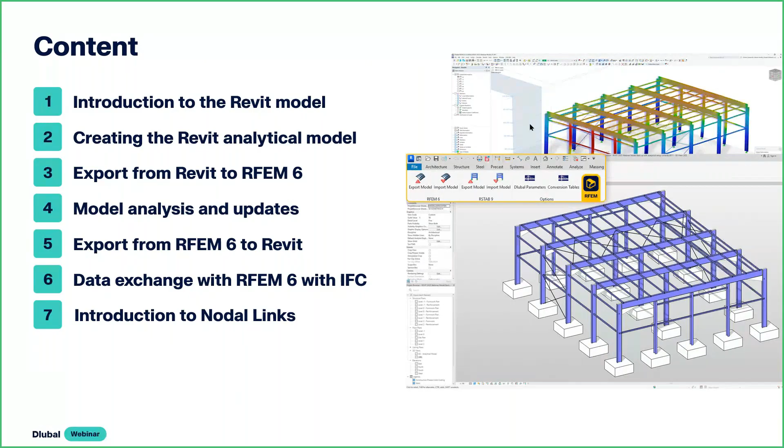So now I will switch over to Revit, and here is the model that I've prepared. It's a basic steel structure consisting of steel frames with some coupling members and some X-bracing. You can see that for my column, I have my cross sections. Most of these are all W shapes, and then I have steel A992 for the W shapes, and then I have my X bracing assigned.

And this is the structure that you would create, probably from the architect. The plan is to help the structural engineer by exporting this structure to RFEM 6.

So to do that, first we want to go into the Dlubal tab. This tab, our Dlubal plugin, is our direct link. This is what you will want to install after installing Revit. It needs to be installed manually. But once you do, you'll have these 6 buttons here.

The first 2 buttons are for exporting and importing the model between RFEM. Then you also have the same options, but for RSTAB or other programs. And then you have these last 2 buttons, the main one being the conversion tables. So I'm going to open up the conversion tables and just go over these quickly.

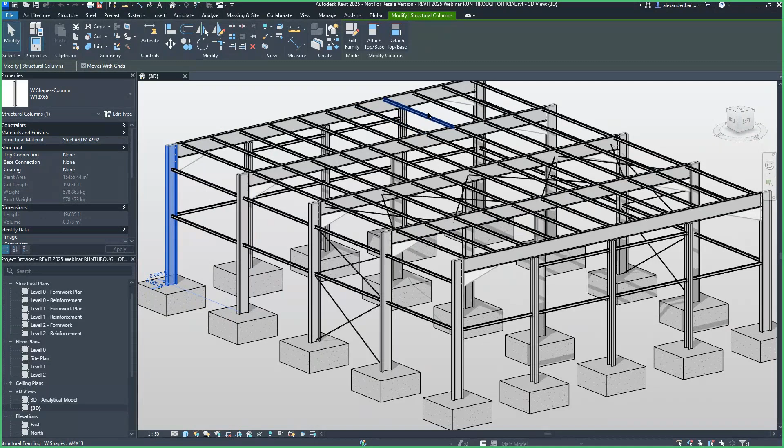So to do this, first we'll go to the Analyze tab. And under the Analyze tab, there's a button here called Analytical Automation. This is what's going to help us create that analytical model.

Here you can see the first option is we can go from an analytical model to a physical model, or we can go from a physical model to an analytical model. This is the option we want to go with today.

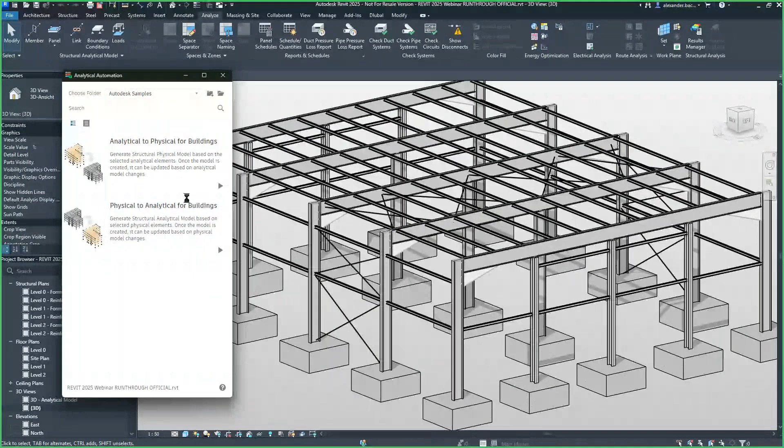I'll click on that, and then you'll see some additional options come up. The first thing we want to do is select what we want to convert graphically. So I will select that graphically in Revit. Now that that's selected, we have a next option here.

This is a tolerance. Right now, this custom tolerance, basically if a member is within this tolerance, then it will be connected. The analytical member will be connected within this tolerance. This is based off of a length, and my units right now are in feet, so this is 1 foot.

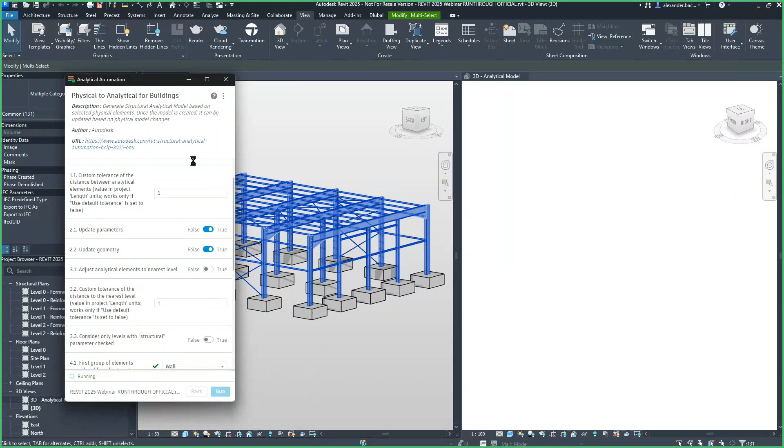Let me open also the analytical model and put them side by side. Let's run this to see what 1 foot looks like. And so I've created, you can see the analytical model based off that 1 foot tolerance has been generated.

You can see that my coupling members here connected to the beam because they're within that 1 foot. You can also notice some other members have also done the same. If we change this to something like 0.8 feet and run it...

Now you can see that those members have straightened out and everything looks better, but you'll notice that my coupling members are still kind of floating here, and some of these other members aren't completely straight. Also I have this cantilever at the end of my column as well.

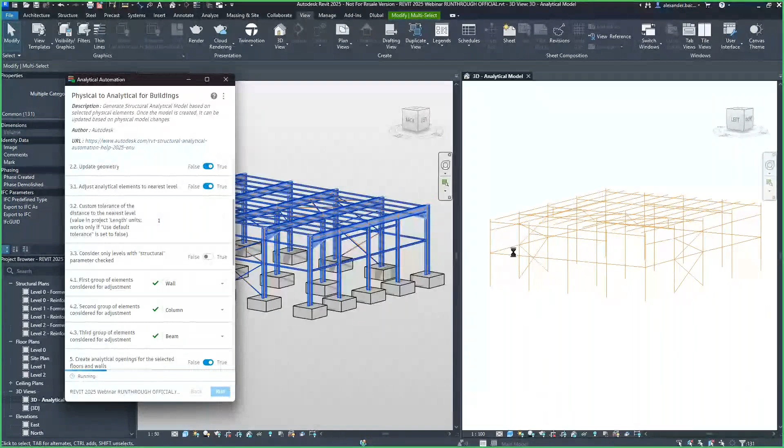So there's another option we can use to fix that, and that is the adjust analytical elements to nearest level. Once I turn that option on and run it, we'll see what that looks like. That'll adjust all the members to the levels that are created in Revit.

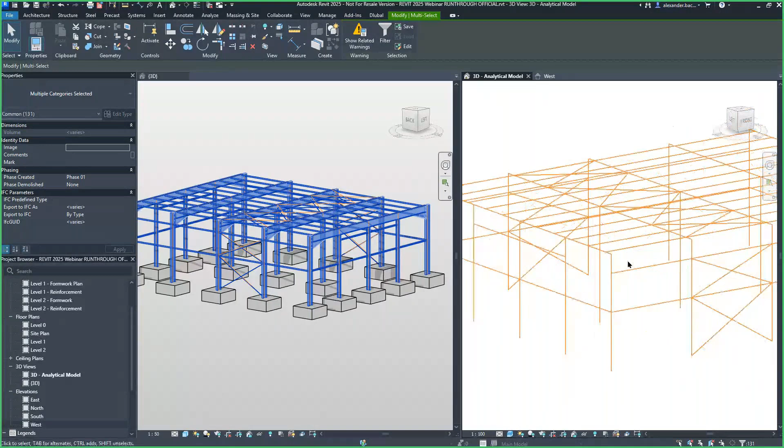For example, if I look at the west view, all of the members or all the analytical lines will now be adjusted to these levels. So now everything looks better. Everything is straight and all of my members are connected and everything looks good.

The only issue with this is now it's not super optimal because my analytical lines are now resting on the flanges of my beams, whereas I would like these analytical lines to be in the center of my beams.

So what I can do is there is another option that can help with this, and that is called consider only levels with structural parameter checked. I can check this on, and all of my analytical lines will adjust to any level, if I click on one of these levels, any level that has this structural option turned on.

So what I'll do to utilize this option is I'll create some copies of my levels and activate that option. This first level, I'll just go through, create a copy, and then I'm going to move that copy down like so. With that copy, I'm going to rename it, and I'm going to check on the option structural.

So then I'll do the same thing with this level. Create a copy, move it down, rename it, and check on that option. And then we can do the same thing for this last level, like so.

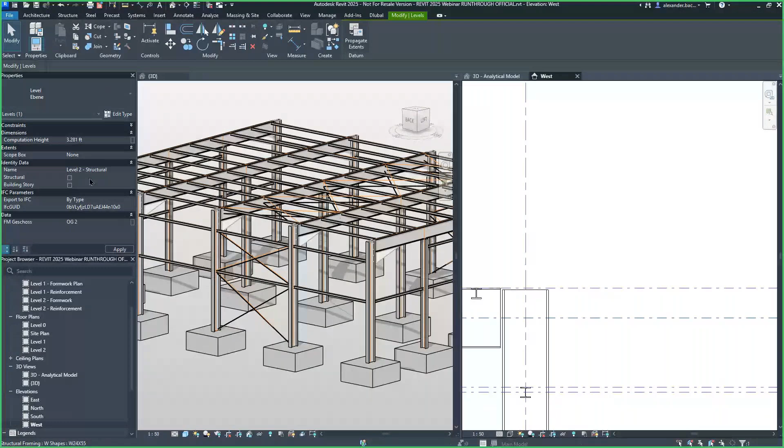Okay, so now once those are created, now we can open that panel back up, and we can turn on consider only levels with structural parameter checked. Now this option does also come with another tolerance. So let's see what it looks like.

For example, if I exaggerate that tolerance, we can see how the tolerance works. If I turn that on, you can see that members down here have been sucked up into this level, into this level, because they're within that 10 feet that I entered.

So that's not a great value. So what if I do something too small? Now you can see that my coupling members didn't get into the level. Some things aren't in there.

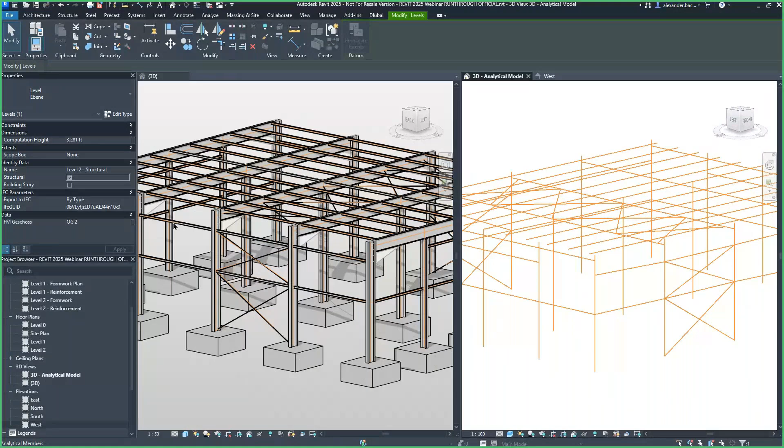So the best thing to do, I mean, well, one is the good happy medium. So we'll run it with 1, but that's how that tolerance works. And so now our analytical model is created. Now you can see that my analytical lines are within the center of my beam.

And yeah, everything is connected. All my cross bracing, they're all meeting at the same joints and everything. So that's good. So that's how you can create an analytical model within Revit using that tool.

Now that we have our analytical model, there's other model data you can add, like boundary conditions. If I go under Analyze and Boundary Conditions, I could add point, line, or area supports in my analytical model. I can also add loading, like point loads, line loads, and area loads, along with load cases and load combinations.

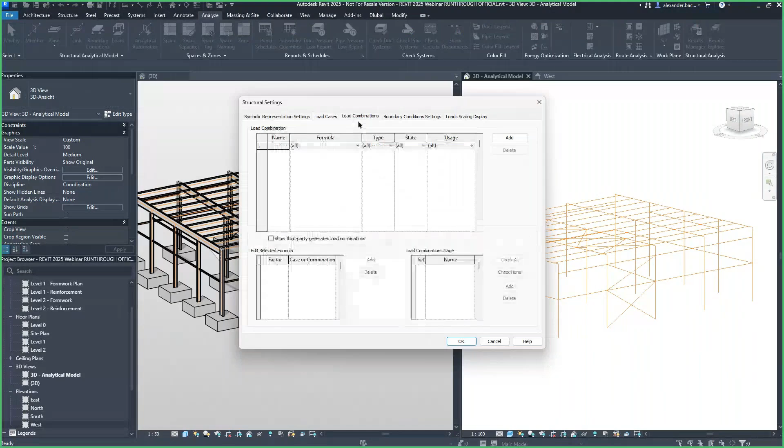All of this info can be carried over into RFEM. So if you wanted your Revit model to be your all-in-one model, doing your architectural detailing and also creating the structural info, you can do that. Or you can simply leave it up to the structural engineer and export the analytical model into RFEM. It's totally up to you.

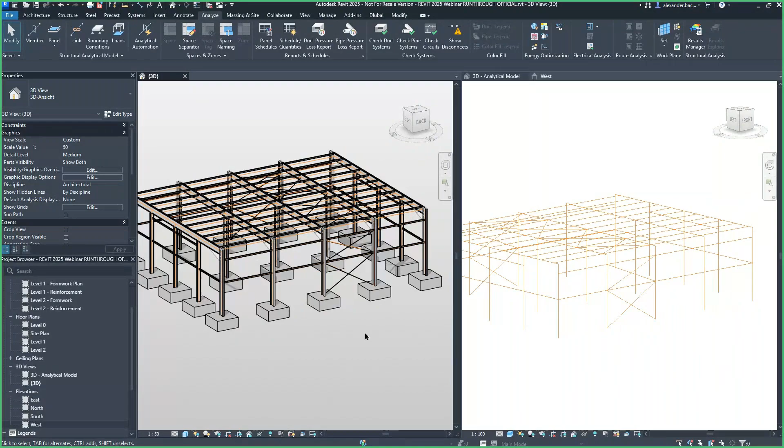So now we'll go over exporting this to RFEM. I'm going to move my windows over, and we'll go up to Dlubal and go to Export Model. We want to export this model to RFEM 6.

You can either create a new structure and have RFEM create a new file and import the model in, or you can overwrite an existing structure. I'm going to create a new structure and have RFEM create a new file.

On top of that, I can also have RFEM open up a previously saved template. I have a template I've created from a previous model, and it's really easy to do once you have the model you want to use as a template—it could even be a blank model. You go to File, then Save as Template. Then all you need to do in Revit or in the Dlubal plugin is point your computer to wherever that template file is saved. So now when it opens a new file, it'll open that template, so it's not a completely blank file. That's great if you want to save things like load combinations or anything.

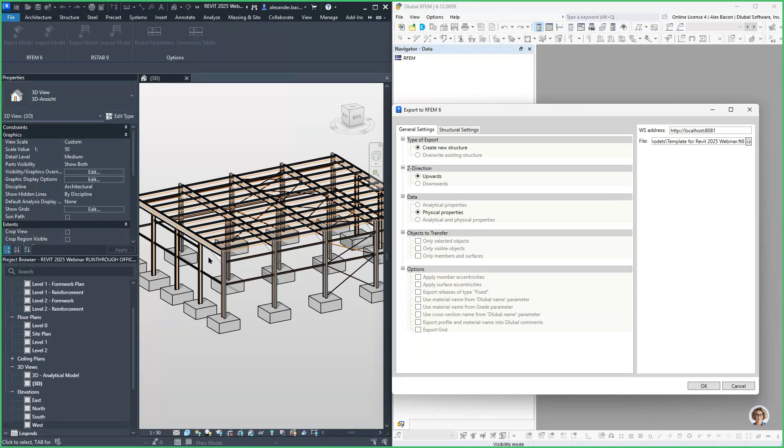I can also set the Z direction to upward, which is what I'll keep it as. You can choose between the analytical, physical, or both to export. I'm going to choose the physical—the reason doesn't really matter, but the physical model and the analytical model in Revit can have different model data. For example, the analytical could have different sections or materials compared to the physical. I'm choosing the physical because it keeps the member rotations correct, which is good.

For objects to transfer, you could transfer only selected objects or only visible ones, so you can play around with that. Lastly, the grid can be exported, but I'm not going to. On the second tab, model data, I'm exporting model data. You can export the loads too, but I don't have any defined, so I'm not going to. Now once I click OK, that'll start the export process.

This is where Revit and RFEM communicate with each other via API. This is a good time to mention that both programs need to be installed on the same PC—this is a requirement of the Dlubal plugin. But now that the export is done, we can see the model over here in RFEM.

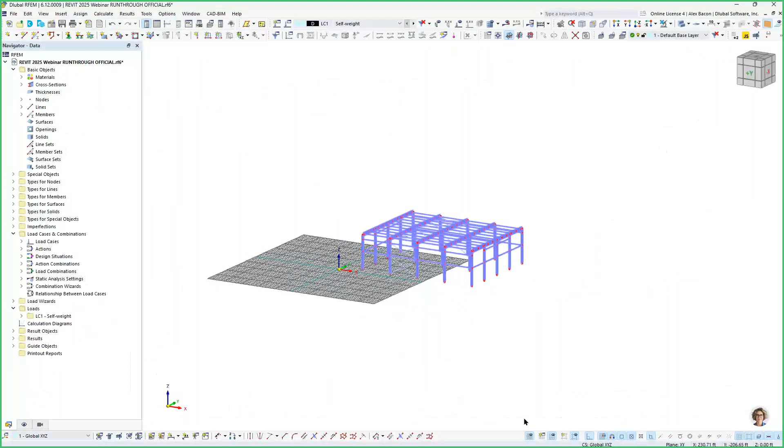So the model has been imported. The first thing that's always good to do when you import a model is to check it visually. You can check and make sure your materials have been correctly mapped over, along with all of your sections.

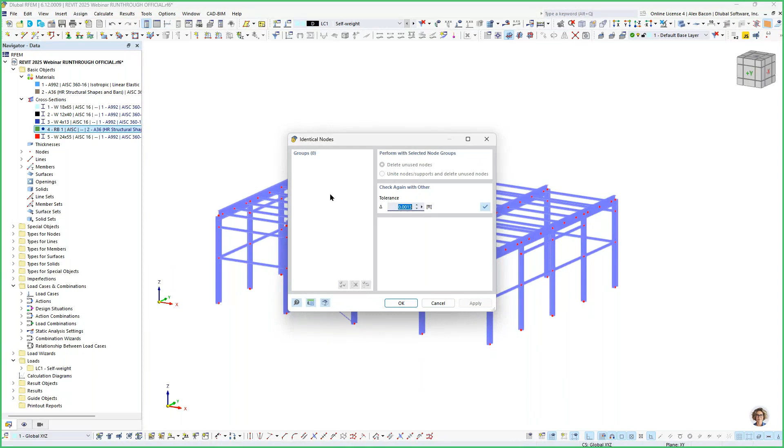There are also tools within RFEM that can help you do model checks. If we go up to Tools, then Model Check, then Identical Node, this can check for identical nodes within a tolerance. If there are any nodes, more than one, that lie within this tolerance, they'll show up here. For example, if I type in 5 feet, you can see how it detects the nodes, and then you can choose what you want to do with those identical nodes.

The other tool we have for model checking is overlapping members, so we can check for those. I don't have any, but that's always a good thing to check for.

Now with this model, we want to prepare to run a simple self-weight check, just so we can check the results.

To get a better understanding of the structure, I'm going to render it according to section views. I can go to cross-section and get a nice view of each cross-section, color-coded. You can change the color of any of these, and that's a good render.

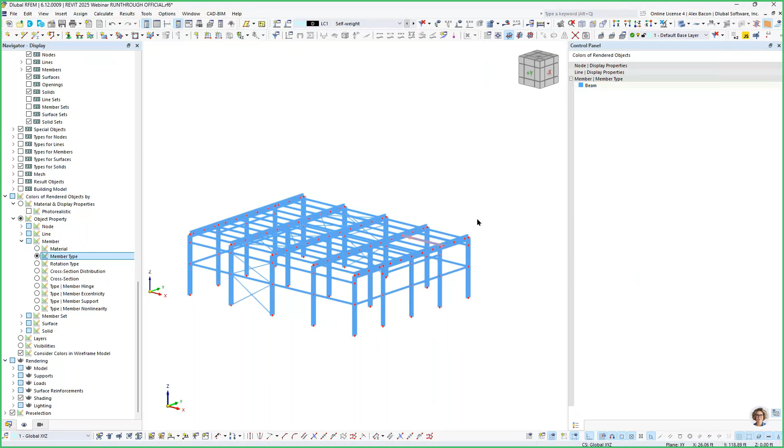We can also render it according to member type, so I can see all my members are set to beam. Another good one is member hinge, so I can see that I don't have any member hinges defined, meaning all my connections are currently completely rigid with all 6 degrees of freedom.

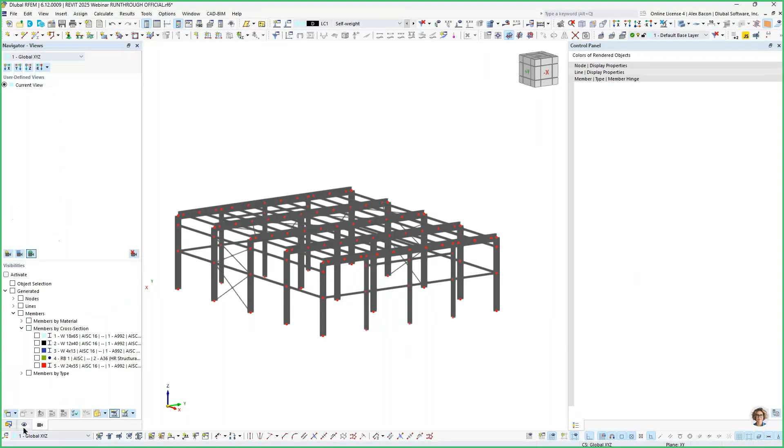Now I would like to edit some of my member types. I'll go to my views, change this back to member type, and isolate my cross bracing. I'll highlight all of those and change them to tension, so now these members can only take tension forces.

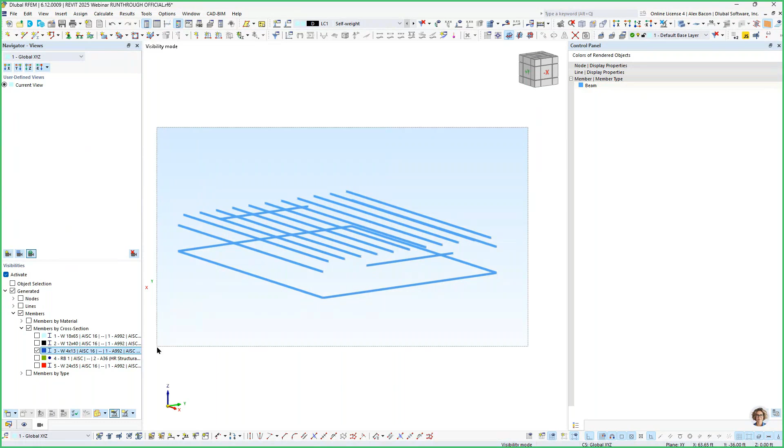Next, I want to change all of my coupling members to truss. I'll highlight all of my coupling members and change them to truss, so now those members cannot transfer moments—they have a pin connection.

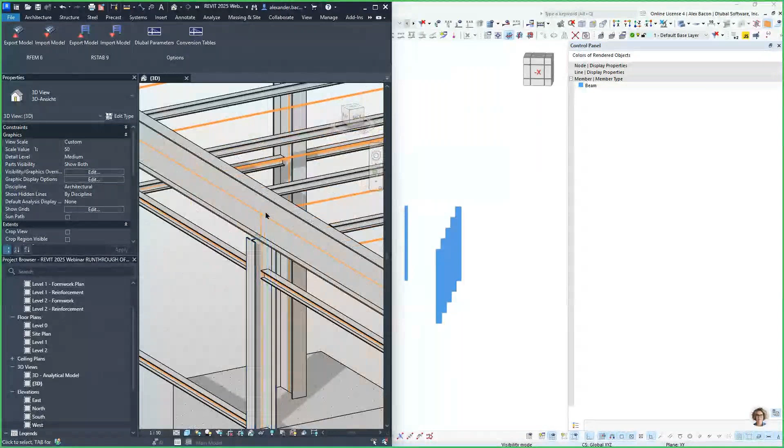Lastly, I'd also like to apply hinges to my wall and center columns, so I'll create or show those. I only want to apply member hinges since we have pin connections here at the top of my columns. I forgot to mention the connections—yes, I have some defined in Revit. For the columns and beams, I have plates and fasteners, and the columns framing into the beams here are pin connections, so I'd like to consider that in RFEM.

I'll go to the data navigator, under types for members, and double click on member hinges to create a new one. It's a moment release, and I can assign these member hinges to the tops of my members. I'll click OK again, and now you can see white pins at the top telling me I have member hinges there. Under the member hinges display, you can also see what that looks like with hinges assigned.

Lastly, before we can run the calculation, I'm going to exit this view. I also need to add nodal supports to the bottom, so I'll create or assign a hinged nodal support and highlight all of my nodes there. Now this structure is ready to run a self-weight load case, so I'm going to run the calculation.

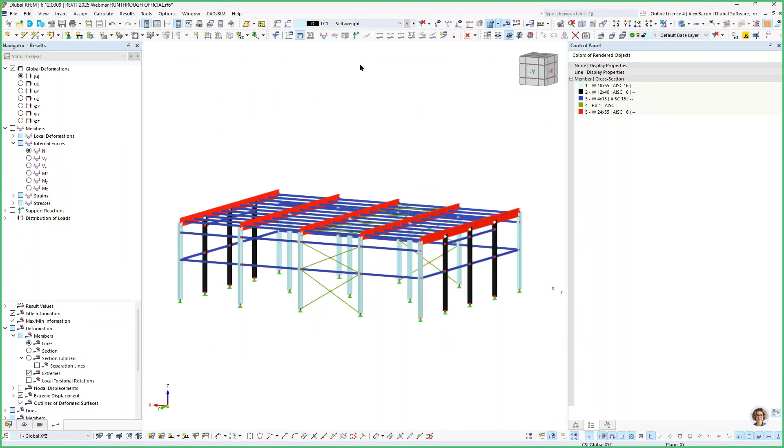It's done. Now the best thing to do is check the deformations—they really tell you a lot about the structure, and right now ours are looking good. I can change this to colored section and wireframe render; we're getting a max of 0.07 inches, which is in our coupling members. So we can check the deformation.

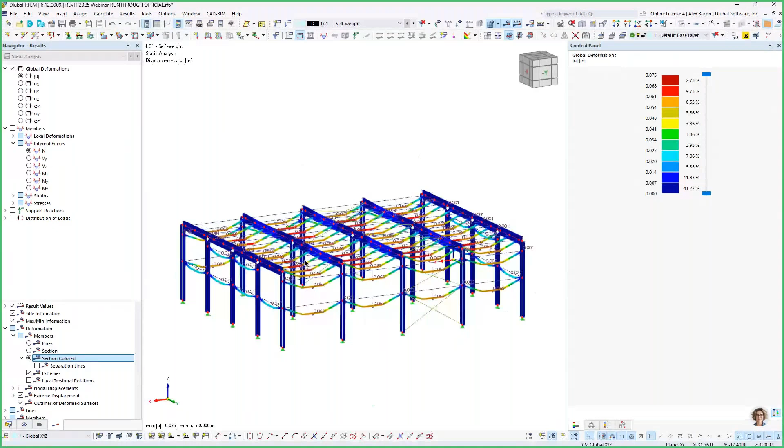We can also check the member internal forces, like the axial forces on the columns, and the moments on our frames here. I can isolate those to get a better view. We see positive moments within the center spans and negative moments where our columns are framing in, so it looks like everything is good and correct with our model. That's good to see.

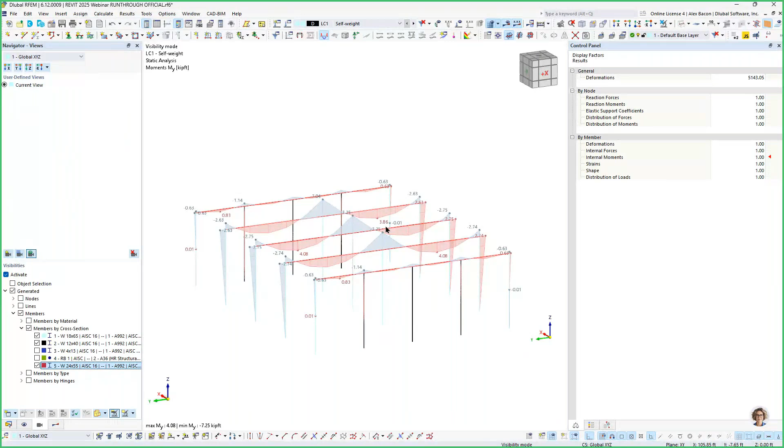Theoretically, the next steps for this model would be to add in some more load cases and loading, have those load combinations created automatically, and then run through the design with our design add-ons. I'm not going to do that with this model today to save time—I'd like to move forward and import this model back into Revit.

So let's say you ran the design and you changed some section sizes or materials, and you want to update that in the Revit model, which can be done. It is possible to simply update sections or materials within the Revit model. If you did make any geometrical changes, then you would want to import the whole model back in.

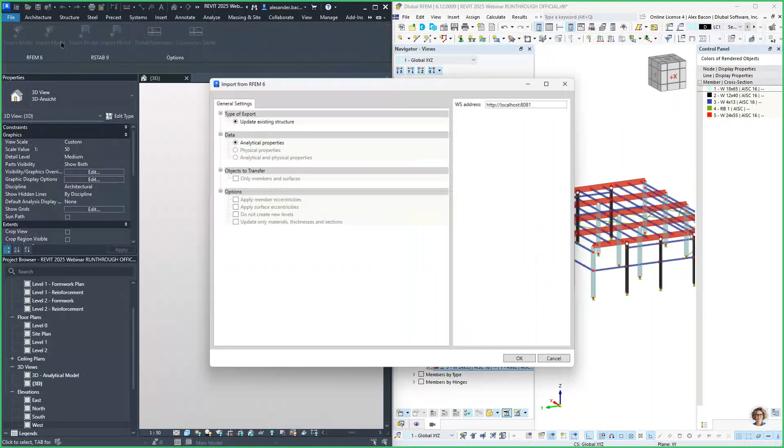I'm going to delete my Revit model and go up here to import model. We want to update the existing structure. We can't create a new file within Revit automatically. You can import the analytical model or the physical model, or both the analytical and physical properties. I'm going to choose both.

Here's the option where if you only wanted to update materials, thicknesses, and sections, that option is there if you don't want to wipe or delete the model in Revit. So now I can run that import.

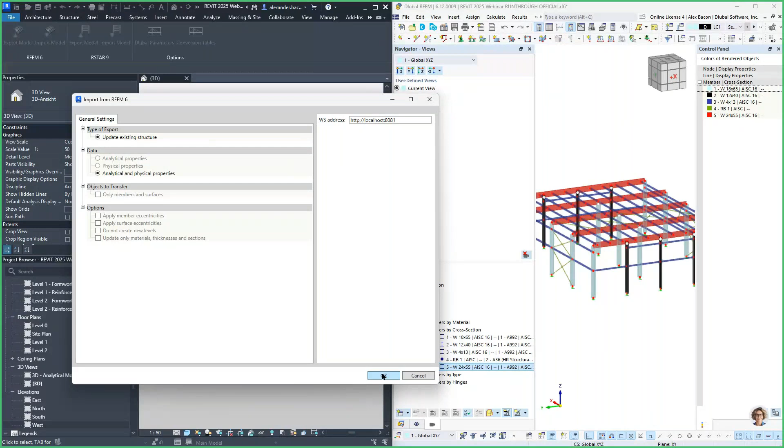You'll see the status down there in the bottom left of RFEM. This window is what it'll look like if you don't map every section in the conversion tables within Revit, and this will simply come up. It's saying my cross bracing section is not mapped to anything. It's really easy - for any of the families you have installed, you can just go down, choose that section, and hit apply to map them there if you don't have them in the conversion table.

So import has succeeded, and you can see we have imported both the physical and the analytical models. It's great because if I show the analytical model, I have my nodal supports in there automatically from RFEM. So all of that model data in RFEM can be saved in here.

I can even check my members, and I can see with my members, I have my member end conditions. So those hinges, even from the truss members we defined in here, come in. You can change the degrees of freedom for these supports if you wanted to here. All of that info comes with the analytical model.

So that's basically the Dlubal link - that's how you can use the Dlubal link to import and export models and analyze them between Revit and RFEM. Next, I would like to go over the data exchange using IFC.

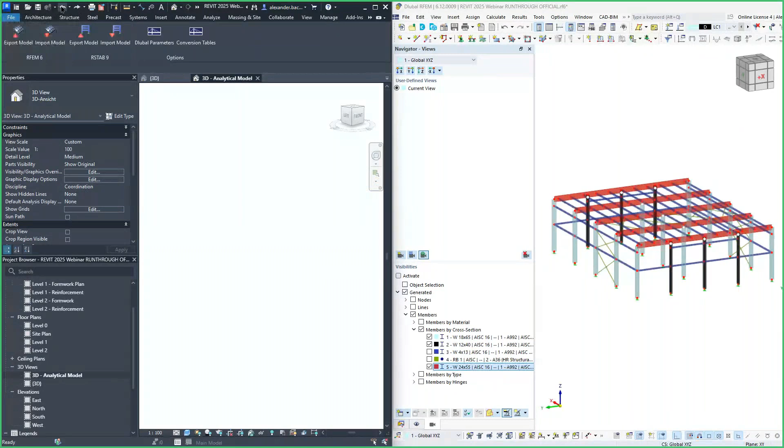Often Revit and RFEM 6 are not being used on the same PC. As far as we know, Revit cannot simply export the analytical model via a shared file extension. So therefore, we can just focus on the physical model and exporting that in the IFC format.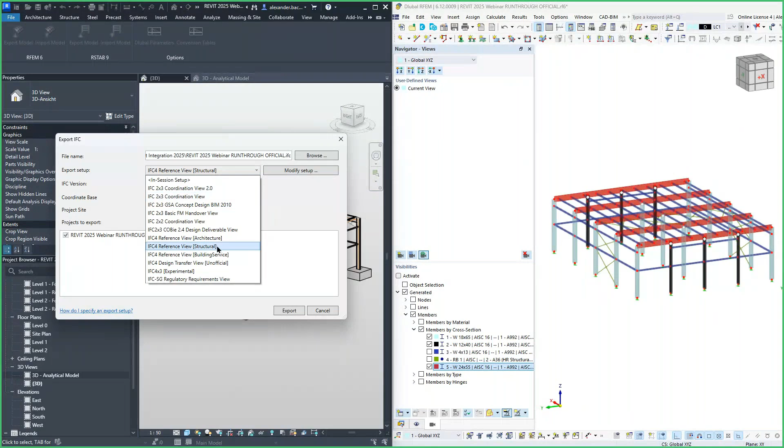Let's open up File, go to Export, and hit IFC. We can choose where we want to export that IFC on our computer, and then choose which IFC version or type we would like to use. Right now we just support IFC 4 reference view and IFC 2x3 coordination view. I'm going to choose IFC reference view and run that export.

It's pretty quick. Now I can go to that file on my computer and open it up in BIMvision.

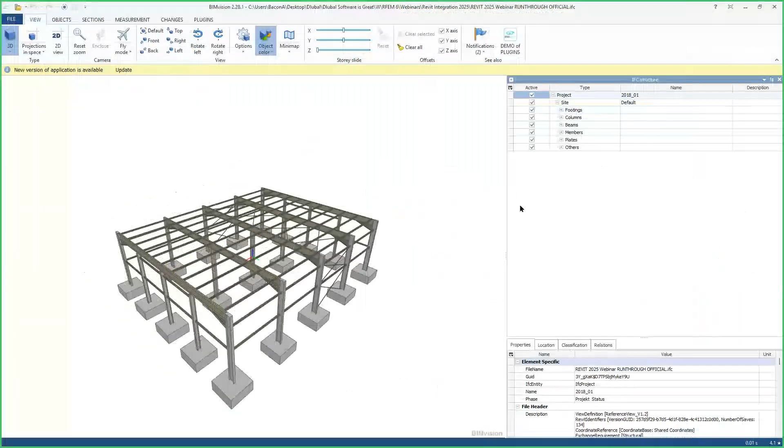So once open in BIMvision, everything comes with it - all of my connections are here. I click on a member and I can see every member comes with the section that was assigned to it, along with the material. So all of that info gets transferred through the IFC, which is great.

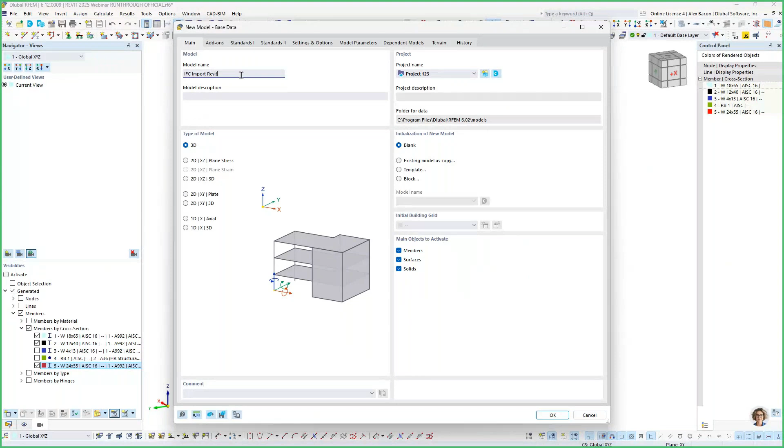So now I would like to import this into RFEM 6. I'm going to open up RFEM 6 and go to File and create a new file. Then I'm going to name this file IFC import Revit. Click OK and create that new file.

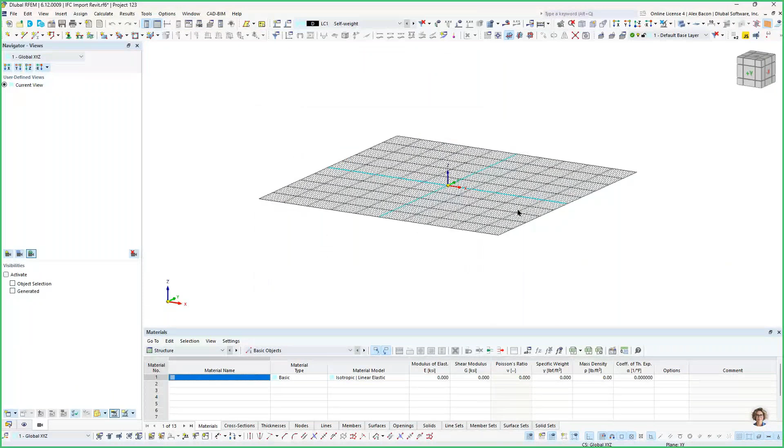Now I can go to File, Import, and Import IFC. I'll choose that IFC I just created, click OK. You can check or decide what coordinates you want the model to be placed on. So now that IFC model is within RFEM.

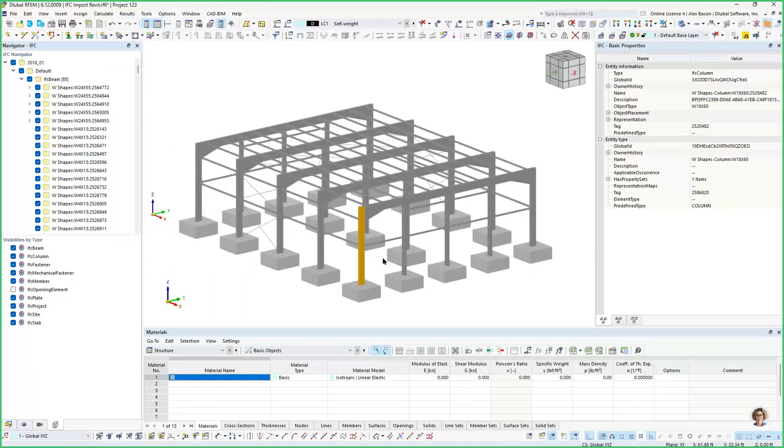So what we can do now - you can see I have all of that IFC info on the left-hand side here. I can even click on a member and turn on my IFC properties panel on the right-hand side, and you can see all of that IFC info comes with it, the section name, also the associated material. So materials and sections come with this, which is great. Right now though, the problem is that these are just IFC objects.

If I go into my project manager or data navigator, you can see I don't actually have any RFEM elements. I don't have any members or anything.

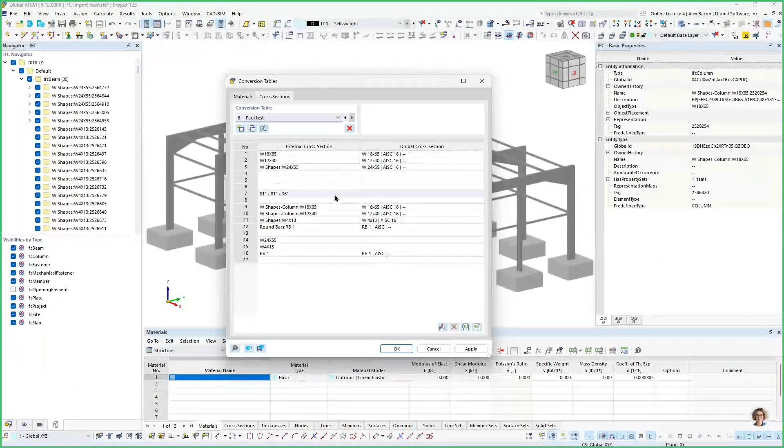So what we need to do is convert this IFC model into an actual RFEM model. To do that, we also have a conversion table with RFEM. If I go up here to CAD BIM and open my conversion tables, we have the external name here along with the mapped material name, and under sections, the same thing. It's really easy. You don't have to even set this up, but if you don't, then you have to assign these sections and materials manually.

But it's really easy to set this up. With this cell here, you can simply use this graphical button to select the section or material name within the IFC properties. You can type it in manually. You can create an XML file and save it and share that with colleagues. And you only have to do this once.

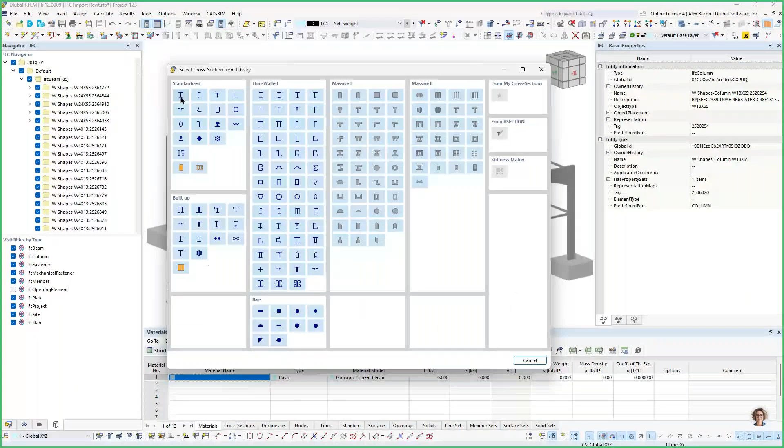So it's really quite simple to set up. You can have multiple conversion tables. So I set this up, and in this cell, you can simply go into the material or cross-section library that RFEM has, and that's how you get the name. So you don't even need to know the Dlubal name. It's pretty simple. So I have that set up.

Now what I can do is hide these IFC elements that I don't need anymore. We'll hide the connections and fasteners. You could convert these connections and fasteners, or probably mostly just the fasteners, into solid elements if you wanted to, but it's not really practical. So I'm going to hide all of them.

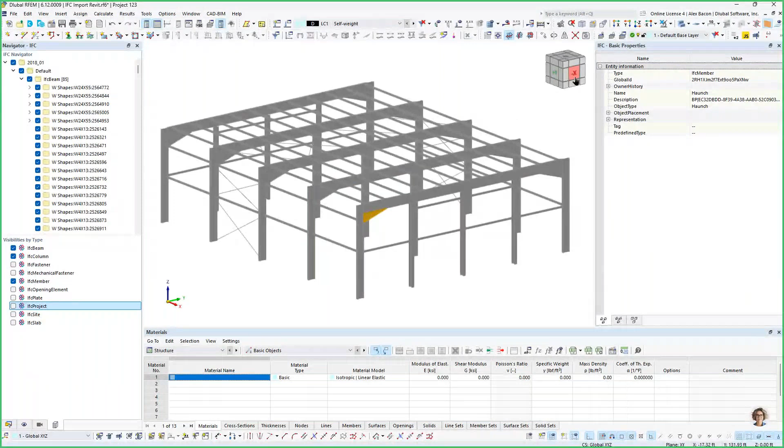I can't hide these end plates here because they're linked to my cross bracing. That can be changed in any IFC file, but for mine, it's a little bit different. So I'm just going to hide my plates here, like so.

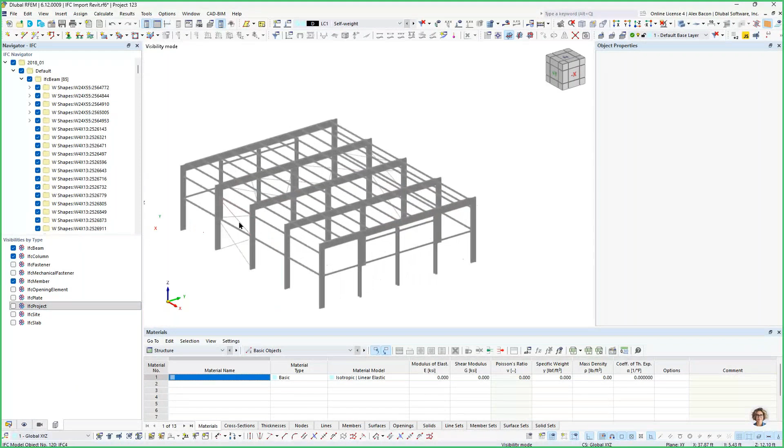Now we have just the members we want to convert. So now I can simply highlight this whole model and right click on one of the elements. You'll see we have a couple options for the IFC conversion: you can convert into straight or curved members, convert the element into a surface, or convert it into a solid. I'm going to convert it into a straight member.

So now all of my members have been converted. All of my sections are mapped to the correct members along with my materials. Now I can hide all of my IFC elements, and now we can simply work with the model in RFEM. Now, the issue is that...

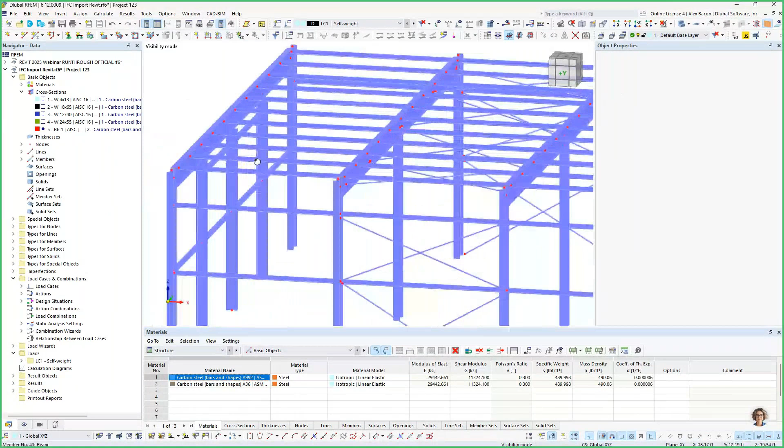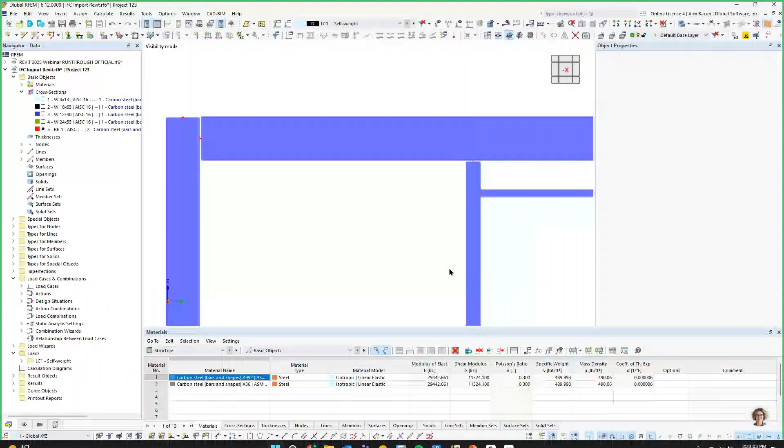We still have the gaps here. Everything is laid out the same as it would be in the IFC model. That gap there is because we had the plate there, and all of those gaps are going to still be there. That means that if we change this into a wireframe view, none of our elements are actually connected in the eyes of RFEM. Everything has that space, that eccentricity, which can be a bit of a blessing and a curse, as you'll see.

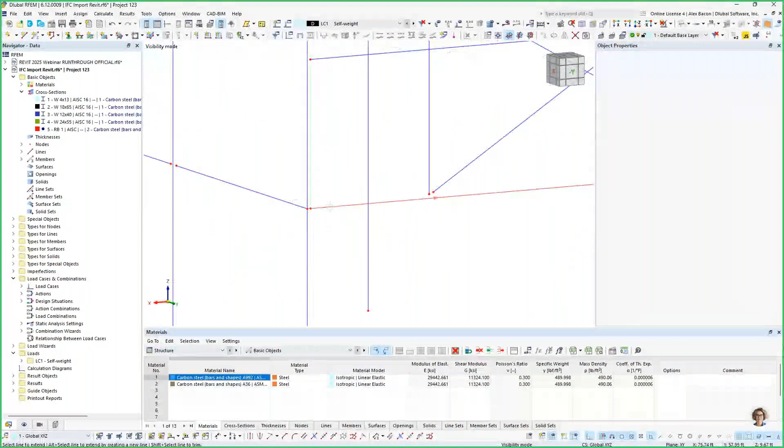But there are a couple of ways. So the next step would be to connect these elements, and there are a couple of ways to do that. The first option would be to use the tool down here called Extend Lines Graphically. If I click on that, it'll essentially extend the lines - they have to be in the same plane - but it'll extend them and connect them like so. You could go around and connect elements like that.

But the issue with this option is, what do we do with these coupling members up here connecting to my beam? They're not in the same plane. What you could do is select them and go to the Move/Copy tool, and simply move these elements into the same plane, like so, and then use the Extend tool to connect them to the beam. So this is the first option - you can use the extend tool and connect everything, going around. But what I want to show is an alternative to this.

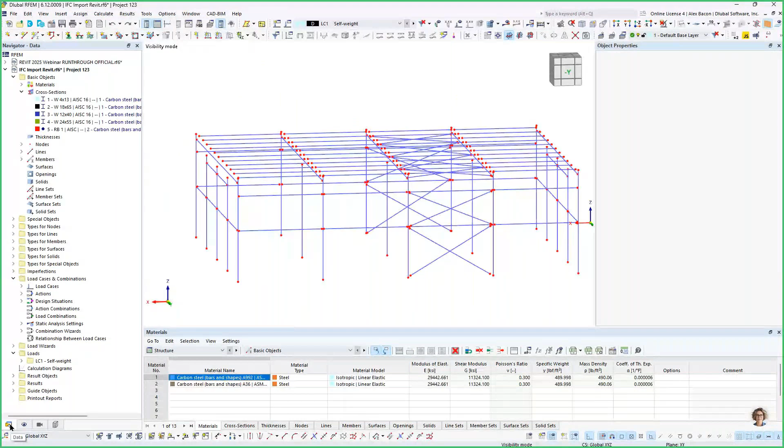And the alternative is an object we call nodal links. So if I go under my base or my navigator, data navigator here, and go under types for nodes, I can double click on nodal links. And this is what the nodal links dialog box looks like.

Basically, we can assign these nodal links to nodes. Once they're assigned, those nodes will look for other nodes, members, or surfaces within this search radius here. You can set the search radius to anything. Then there's also the search method, and right now it'll just search for the closest objects.

In the future, we are thinking about adding other options to include here, but currently the only method is to search for the closest objects. We also have an option down here for adding member hinges automatically to the start or end of these nodal links, as well as excluding objects or including related objects.

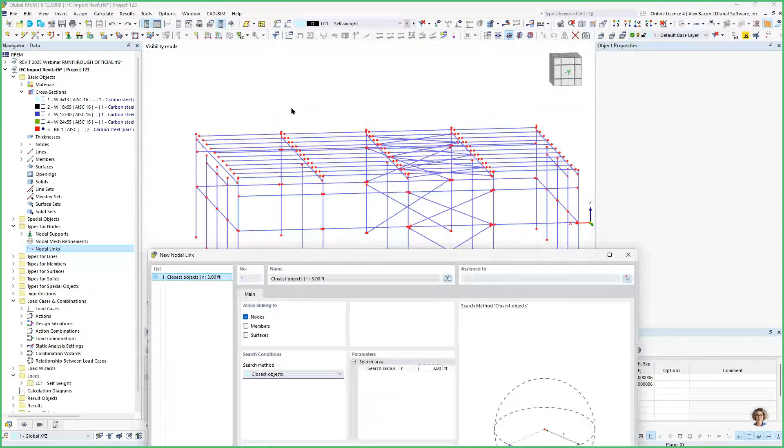So with that said, now I would like to create some nodal links. The first nodal links, I'm going to connect my beams here of my main steel frames to the columns. So I'm going to uncheck nodes and check members, and then go up here to assign to, which is where we'll assign or choose the nodes we would like to assign.

I'm going to create a visibility of just my beams and my columns. And then with this button, usually this is turned on, called ignore related objects, I'm going to turn that off. So now you can see the nodes.

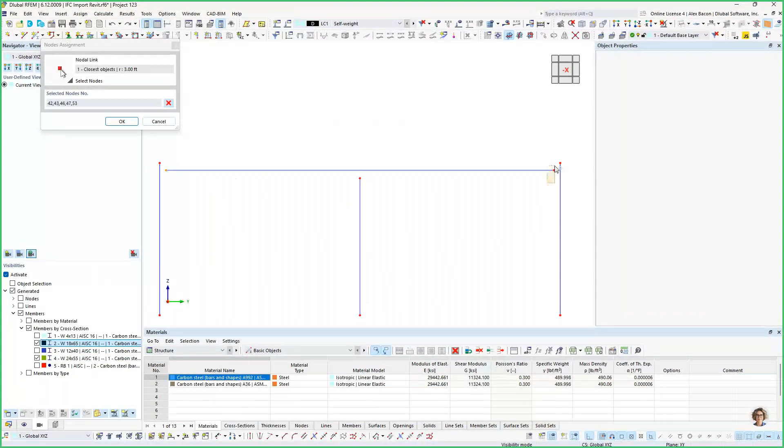And then I'm going to switch my view around and simply choose my nodes here at the end of my beams. So now those are up there, all the node numbers. Click OK, and now you'll see that those rigid links have been created between my beam and my column, connecting the two.

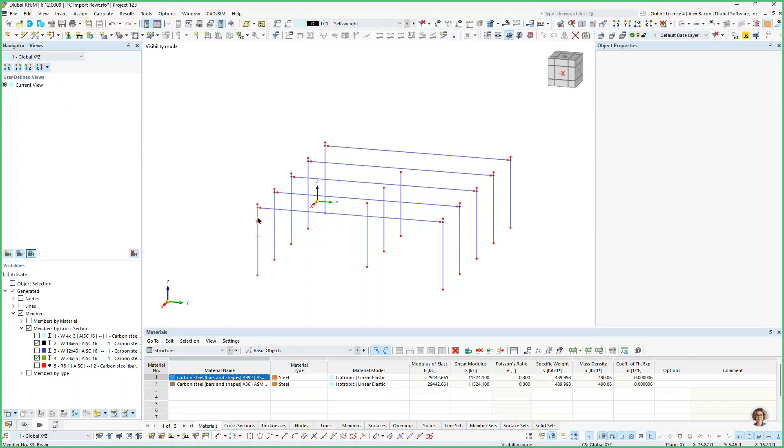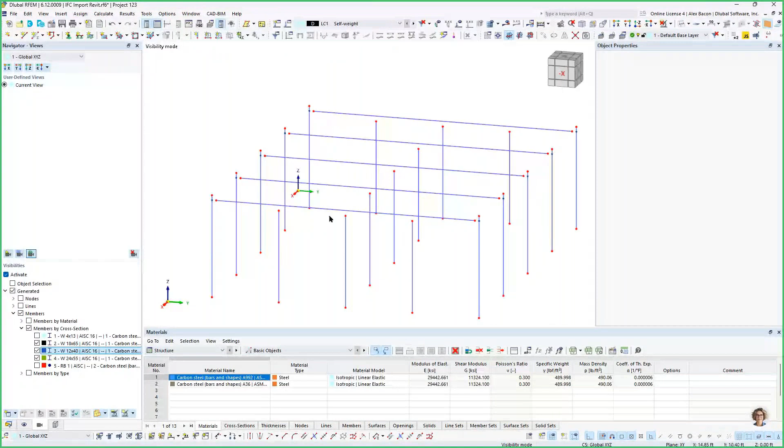So now my columns and my beams are connected. I would like to do the same thing for my other columns. With these columns that are supporting the beam here, we have again that pin connection. So we want to add the rigid links, or we want to add member hinges to the rigid links that we create. So we'll create another nodal link definition.

And when you create these, you can see them on the left-hand side here. You can name them so you don't get confused which one is which. But again, we want to search for members, and this time we want to add a member hinge in. Now you could argue whether this member hinge should be applied to the top of the column or to the end of the nodal link. I'm just going to add it to the start of the nodal link.

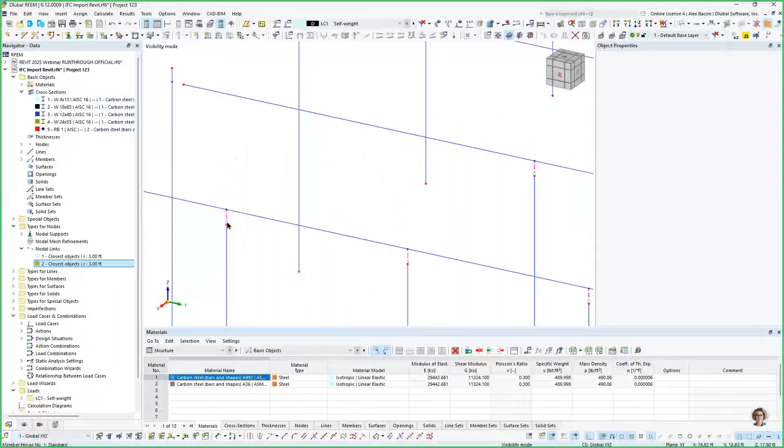So now I have my member hinge definition. Rotation about the local Y and Z axes are released, so moment. I'll click OK, and then click OK again. I forgot to highlight the nodes, so we want to select our nodes. That's important. Click OK again, and now we have our rigid links with our member hinge here, releasing the moment connection between the rigid link and the column.

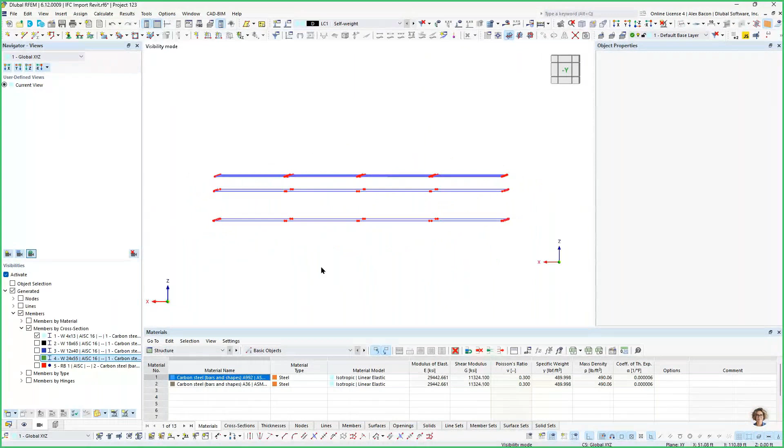So now we want to do the same thing for our coupling members. I'm going to check on just only my coupling members. So let's create another nodal link definition. I'm going to select all of my coupling members and click OK. And now I've created links for my coupling members to link to the columns.

So we can go around and double check that all of them are correct. Okay, so you can see here we have a little bit of an issue with this nodal link. Hopefully that's easy to see. If I activate or show hidden objects, you can see what the issue is. So my X bracing, the link is linking to the X bracing, which is closer than the node that's on my column.

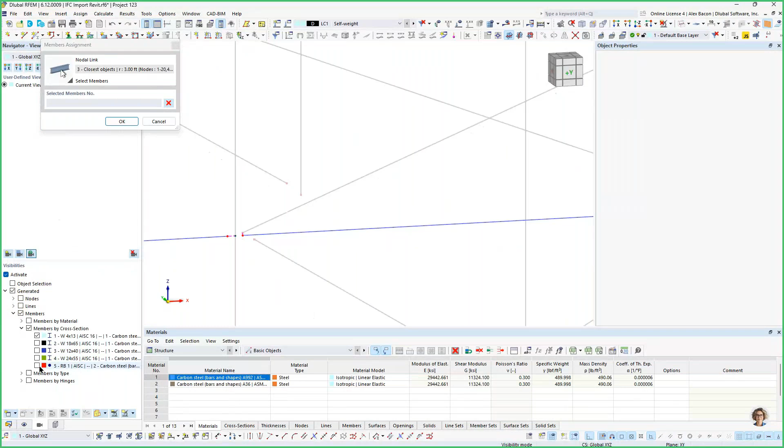And so this is where the option exclude objects comes in. We want to exclude that X bracing. So I'm going to have to activate my X bracings and highlight that X bracing, click OK. And now that rigid link has gone to the column node instead.

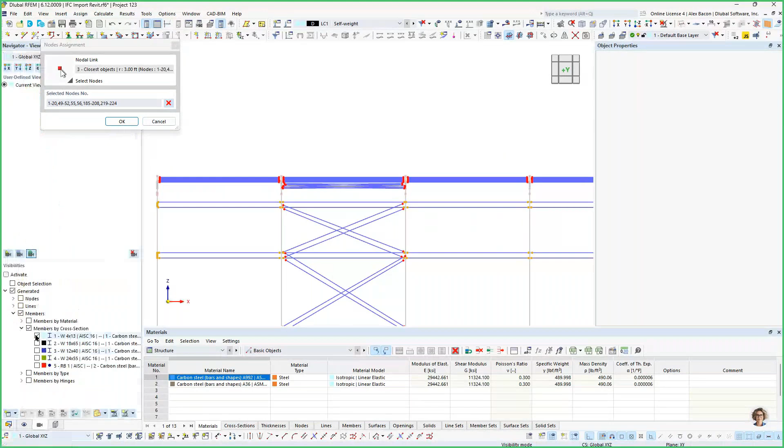So yeah, that's one way to use those. And I also want to do the same thing for the coupling members up here. I don't need to create a new one, I could just include these coupling members within the same definition. So I'm going to highlight those nodes.

I highlighted my X bracing as well, or no? No. There we go.

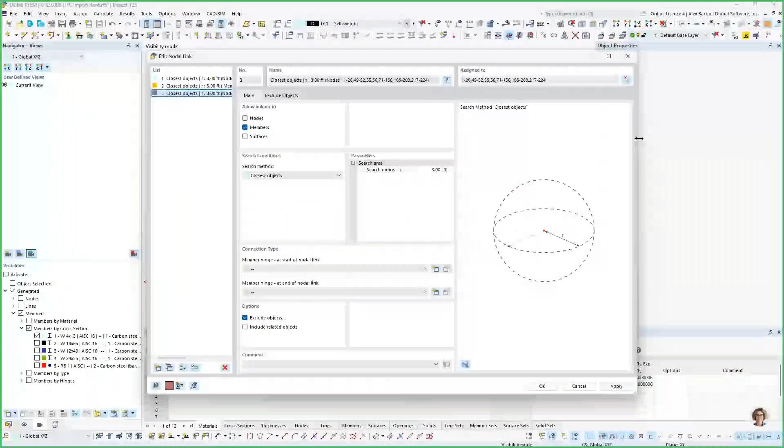I want those to also connect to the beams. You can see these are all good, except some of my coupling members are connecting to my X bracing. So what I want to do is exclude that X bracing from being selected. I'm just going to choose all of my X bracing to exclude from that nodal link. So let's double check. Yeah, all of my coupling members are now connected to my center beams here with that eccentricity and no longer connected to any of the cross bracing. So that's good.

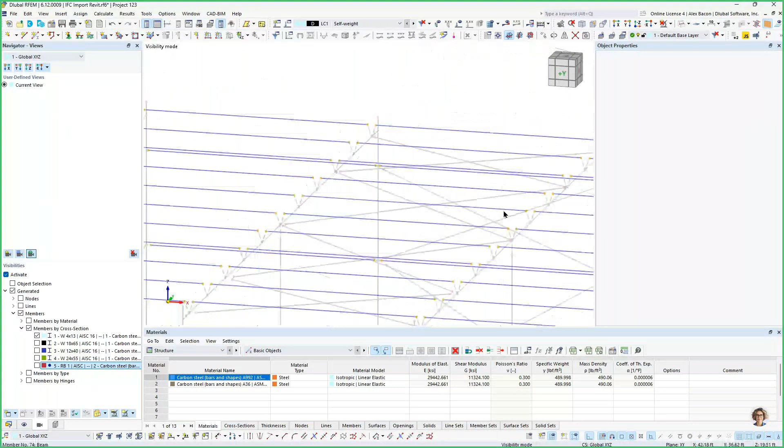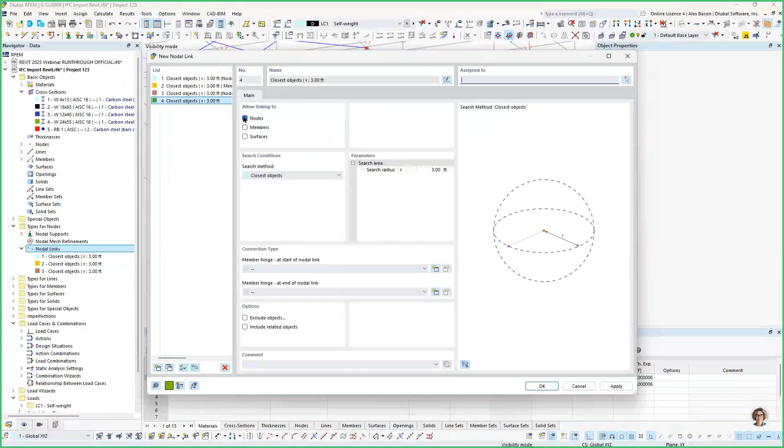Next, we want to do the cross bracing. We want to connect our cross bracing to the nodes on the columns here. I'll create a new nodal link definition. This time we don't want to choose members, we want to choose nodes, because we want our cross bracing to all connect at the same node here on the column. So we will choose all of the nodes for our X bracing, like so. Click OK. And now again, we're going to have some issues with the X bracing connecting to the closest node, which is our coupling members here.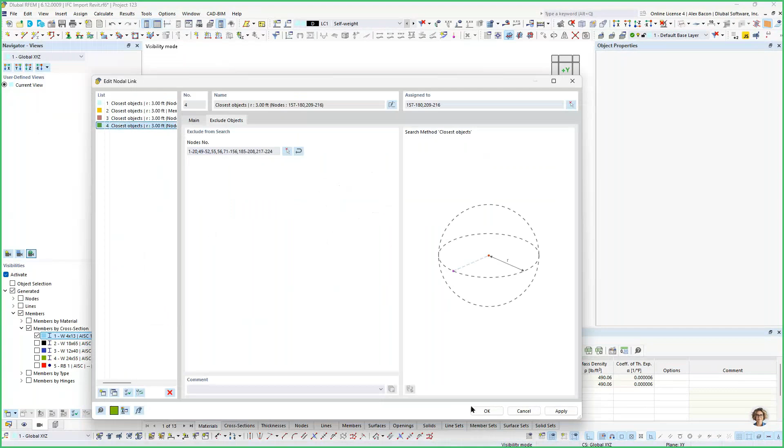So we want to exclude the coupling members now from this definition. If I go back and hide my cross bracing and only show my coupling members, and exclude those from the X bracing. Click OK. If I exit out of, I'll just cancel out of this visibility now. So we can go around. We can see now the X bracing is connected to that same node there.

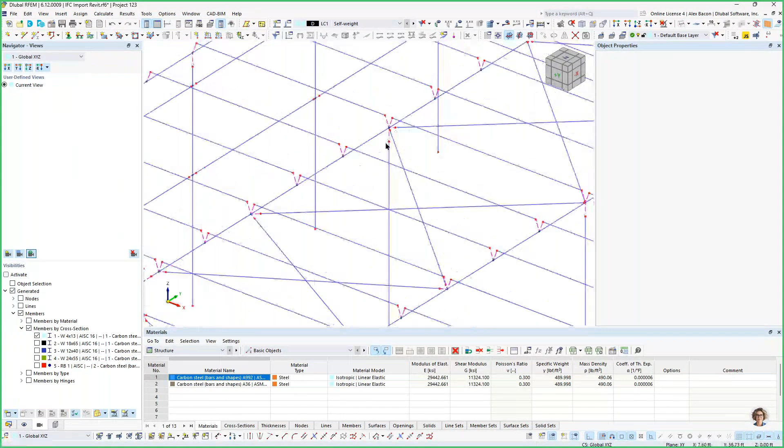Yeah, so those eccentricities are there. All of the X bracing up here is all connected to the right node. It's all good. So now everything is connected.

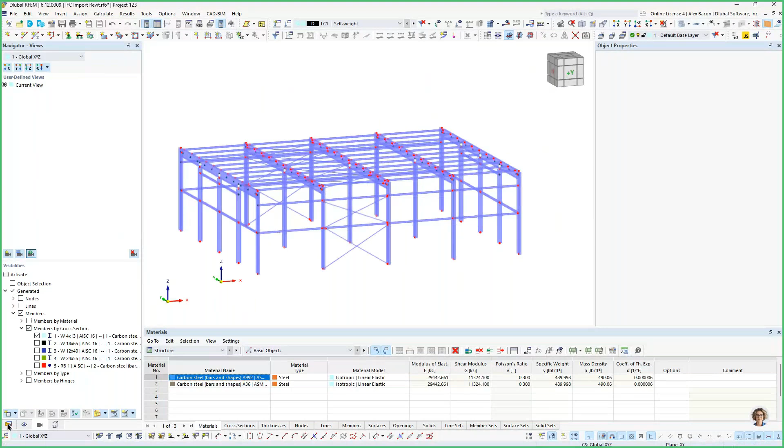And the last thing, again, that we want to do, just like before, is change some member types. So I'm going to change this to cross-section or member type, and I would like to assign my cross bracing to the tension member type. So I can highlight those and just edit them and turn, whoops, not truss, tension. So now those are pink.

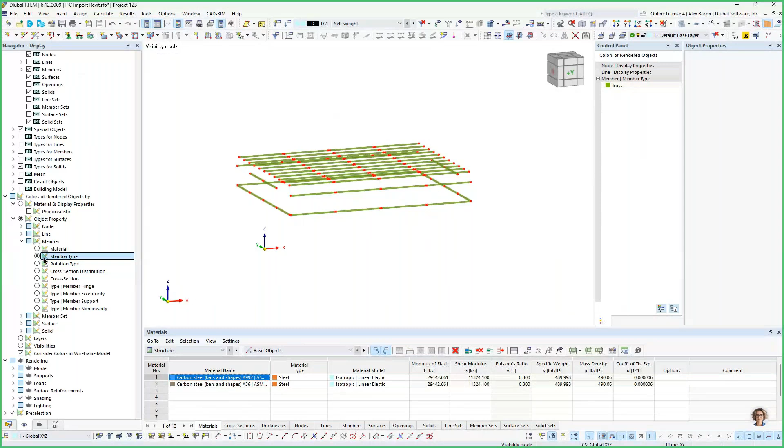And I'll do the same for my coupling members. Double click on those and change them to truss. And we don't need to add any hinges to our columns in the center because they already have those hinges defined. So we have our member types defined.

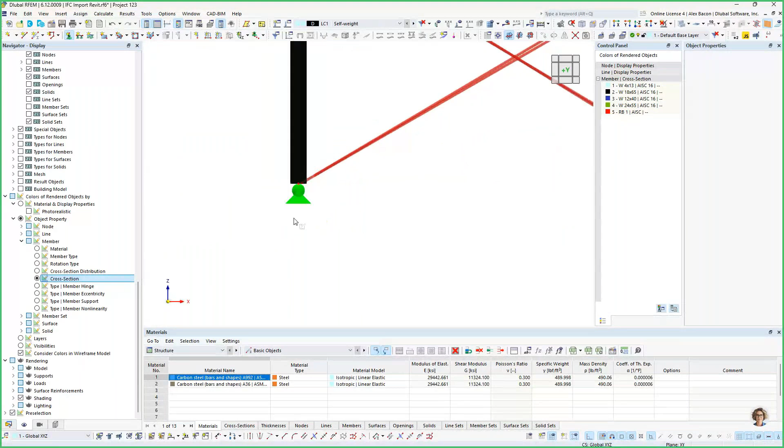Now we want to add in again our supports. So we'll add in our hinge supports down here, catching just those nodes at the bottom of the columns, like so. And now we can run the self-weight calculation and double check that our results look good. So we'll run that.

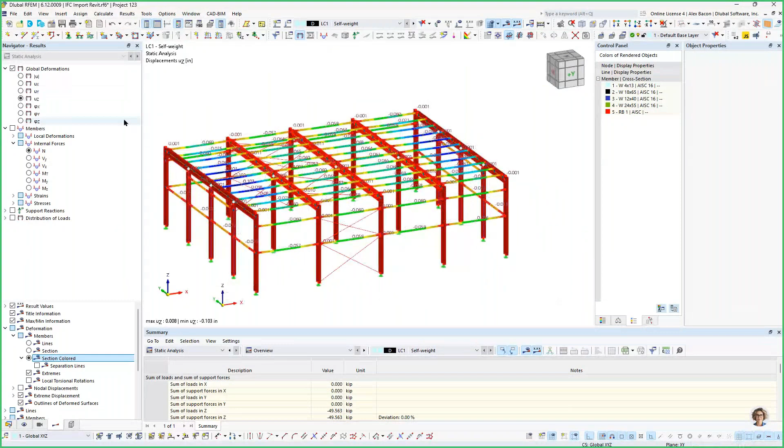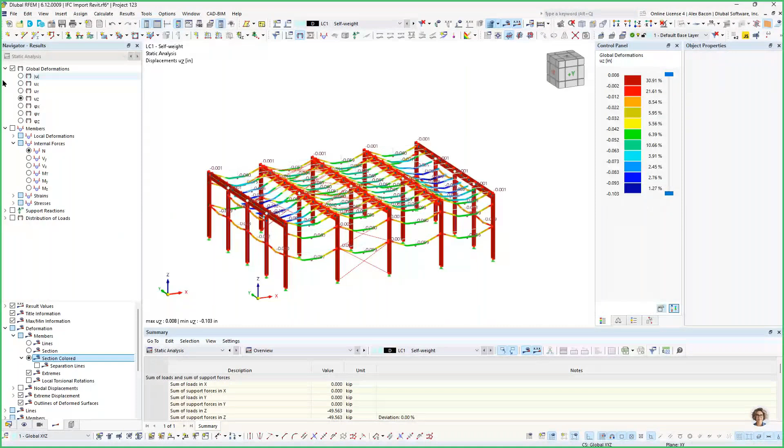And I'm going to turn on section colored. There we go. Okay, so now we can see the deformations. We can see they're a little bit different now that we have those eccentricities defined. We have a little bit of torsion on our outside beams here. We can just check the deflection in the Z direction. If I increase the deformation here a little bit, we can see what that looks like, a little exaggerated, and it's similar to the analytical model. Only difference is now we have those eccentricities kind of, in essence, applied to this model. But the max deformation we're getting is around 0.1 inches.

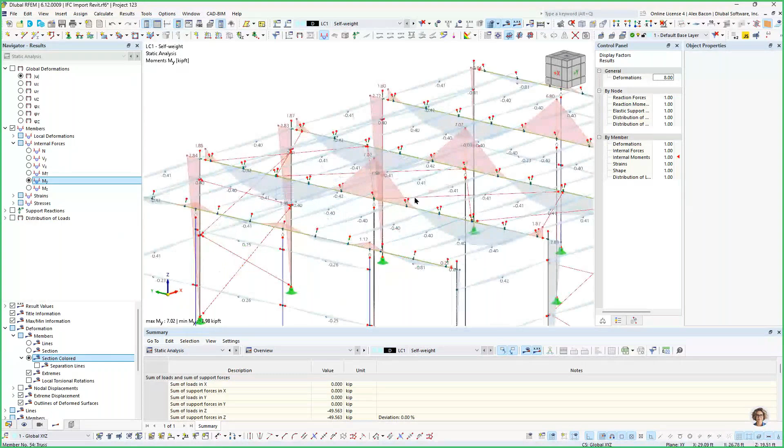So then we can also check our member internal forces. Again, we can see our axial forces, and we can view our moments again on our frames here. And again, we're seeing our negative moments in the center where our columns are connecting, and the positive in the spans there, which is good. And this is comparable to the analytical file that we use with the Dlubal link, but instead we just imported this as an IFC.

And I'd just like to give some additional info. We also have the same links now, but for lines. So if I go under types for lines, we have line links, and you can use these for walls and slabs, and they can be connected in the same way.

For future development, we are testing a tool that will allow you to create these links automatically, but it is not ready to be shown yet. Hopefully it will be released soon, so look out for this. If you're interested and want email updates on when this will be available, please feel free to contact us and we can provide those updates for you. You can also look out for development updates under your extranet account on our website.

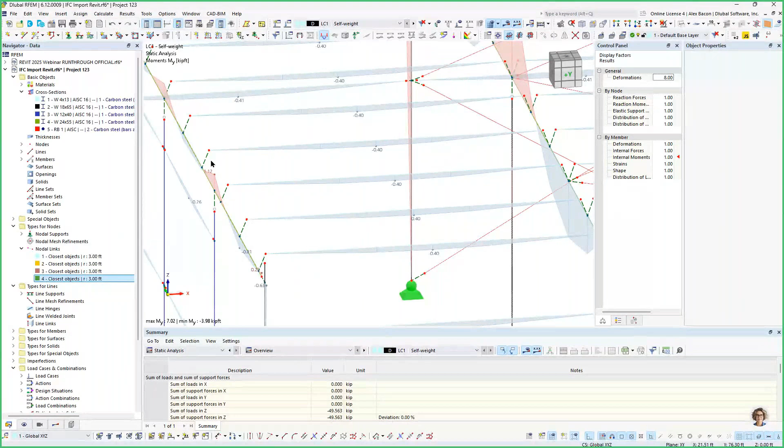This workflow can be an alternative to the direct link. It's great since CAD programs can import and export IFC files. You can also leave the beams basically where they are with these eccentricities, because these eccentricities would have had to be added in anyway. The benefit is that for the steel joints add-on, you would have had to add these eccentricities in anyways. And if you wanted to add a joint here for the coupling members to the beams, you would have had to add that in anyways.

Also, the additional benefit of the IFC file is that the BIM info is saved now within the objects. So if I double click on one of these members, you can see we have this BIM tab here for the member, and all of that BIM info is saved here with the global ID, or the GUID, and our cross-section and material is saved within there as well.

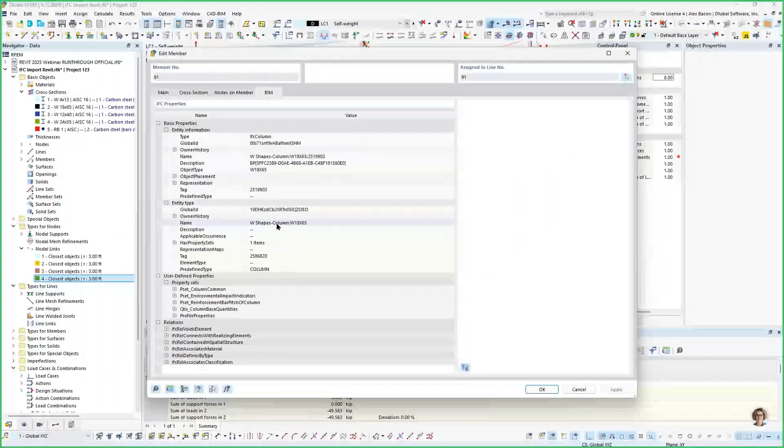So I could just export this. In RFEM, you can also export IFCs. We go to Export, IFC, click OK. I'll just rewrite one of my files, then I can go into the BIM viewer. I think I exported only that member I had selected — you can just export simply only selected members. So I'll save that again, open the BIM viewer, and open that file. This is the file from RFEM that we just made.

I can again click on the member and see the material info and section info saved within that file, along with the same GUID. The good part about this is that because we saved that info in the IFC, we can use that info again, like I just did with the export. The members save the GUID, and this is good because it allows all of us to compare IFC files. If we have two IFC files where the GUID of the objects is the same, this will allow us to compare sections and materials, which is good.

In the future, we would like to include the export of our steel joints and reinforcement in the IFC format, concrete reinforcement in the IFC format as well, but this is something we are still working on developing. The goal is to have a properly looking IFC file exported from RFEM 6 with all of the proper information that is necessary.

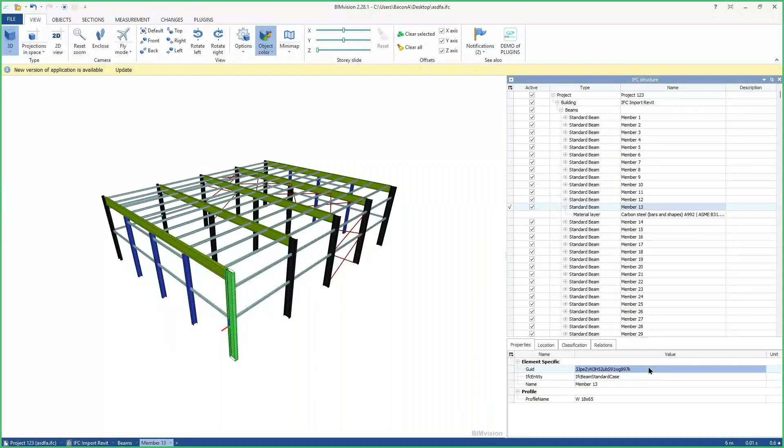And so that is all of the workflows that I wanted to show for today. I thank you for attending and for your attention. I will hand it back over to Amy now.